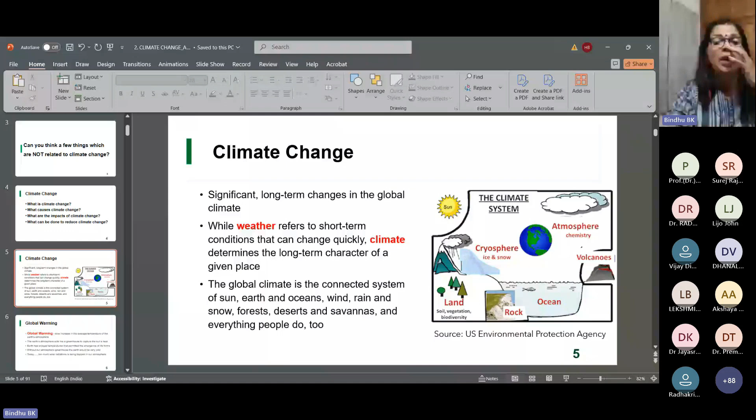So climate change, you know the difference between weather and climate. Weather is very short-term conditions, while climate determines the long-term characteristics. We have been studying it from the 6th or 7th class, weather, climate, etc. And global climate is connected to earth, sun, oceans, etc. And you are well versed with the term global warming. What is the physico-chemical action in global warming? What are the causing gases, carbon dioxide, methane, nitrous oxide, etc.

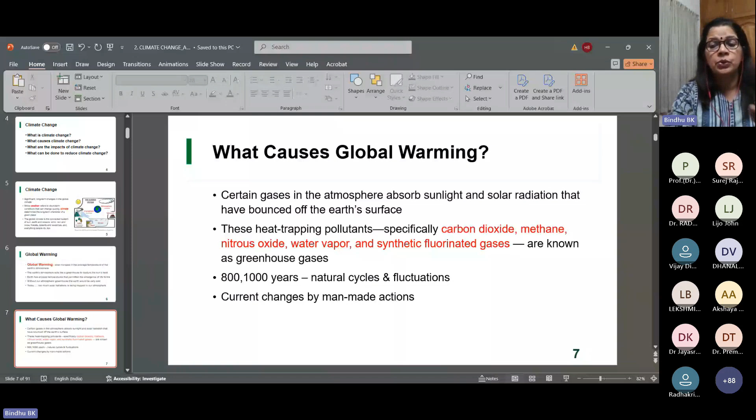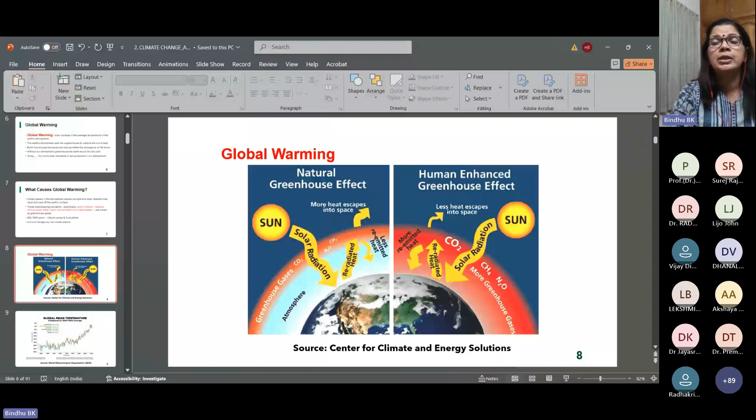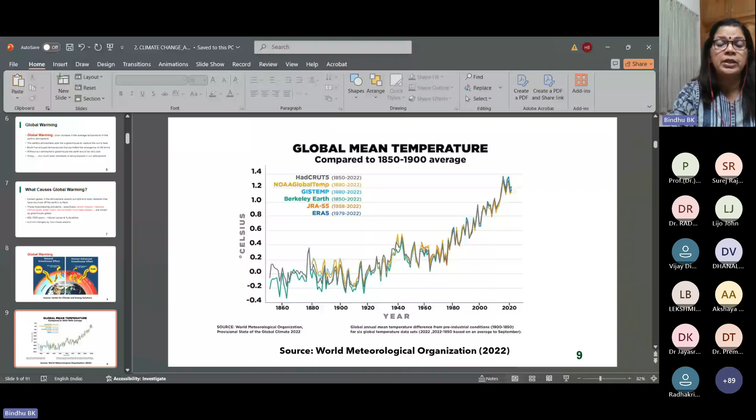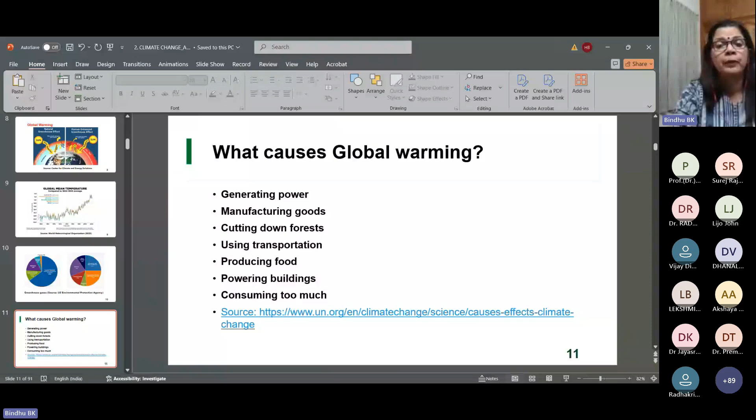And can we say global warming and climate change are the same or synonymous? Even though many times we use them synonymously, there is a little bit of difference in the plain level of their meaning. Global warming is just the rise in temperature, and heat is energy, and when you add energy into any system, changes occur. When global warming is applied in the whole space, it can lead to climate change. So it is technically different, but the causative factors are the same.

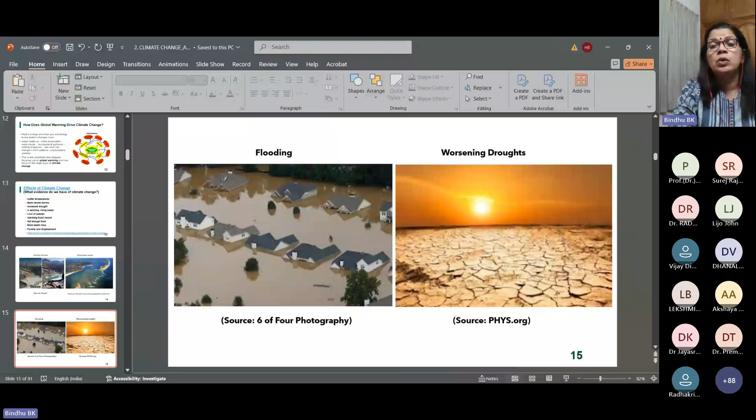So the effects of climate change are very well known: hotter temperatures, severe storms, drought, melting of glaciers, rising sea level, flooding, worse drought, supercell storms, increasing tornadoes, etc. And you are thinking of global warming. I am also thinking of global warming. In this classroom and outside, your society, your home, all people are thinking of global warming, but what action the whole world and the world leaders have taken, that we should know.

And for that, there are certain milestones in the history of climate change. The first one is the Stockholm Conference, the United Nations Conference on Human Environment in 1972. Hope all of you are aware of it. That was the first global summit or global convention on human environment. Till then, global leaders were not that much aware. I am sure that most of you were not even born at that time, 1972.

At that time, the world leaders started thinking of what is to be done with the increasing temperature. So a lot of world leaders participated in the meeting. And have you heard of a speech made by a world leader or a national leader at that time?

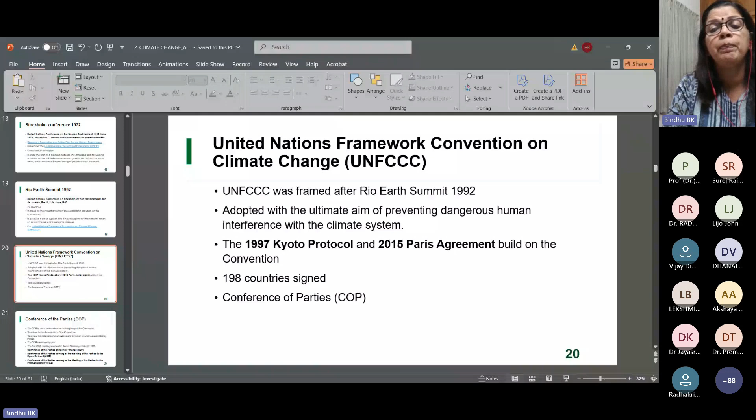So, hello. Excuse me. Okay. Continue, ma'am.

You can continue. Okay. So the COP is numbered from 1995, and the latest COP happened in 2024, COP 29 in Eastern Europe, and the upcoming Conference of Parties meeting is in Belém, COP 30. So we should be aware of that. Anyway, the United Nations Summit on Sustainable Development in New York happened in 2015. And at that meeting, a new plan called Transforming Our World: the 2030 Agenda for Sustainable Development has arisen.

So then comes the concept of sustainable development. So 17 sustainable development goals have been framed, with 169 targets. These are the 17 sustainable development goals. You are familiar with it. And even though it is numbered from 1 to 17, you can see the 13th SDG, that is climate action. Actually, many of the other SDGs are in some way or other linked to the 13th goal, climate. We are moving with that one.

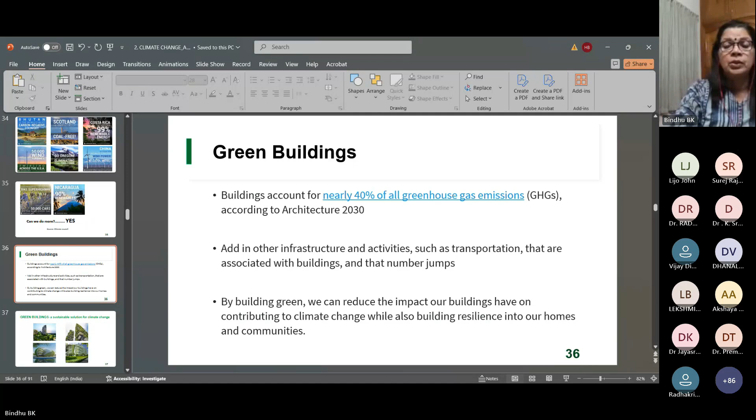A green building can be defined as one which uses less water, optimizes energy efficiency, conserves natural resources, generates less waste, and provides healthier space for occupants compared to a conventional building. These are the merits of green building. They are designed to reduce the overall impact on human health and the natural environment.

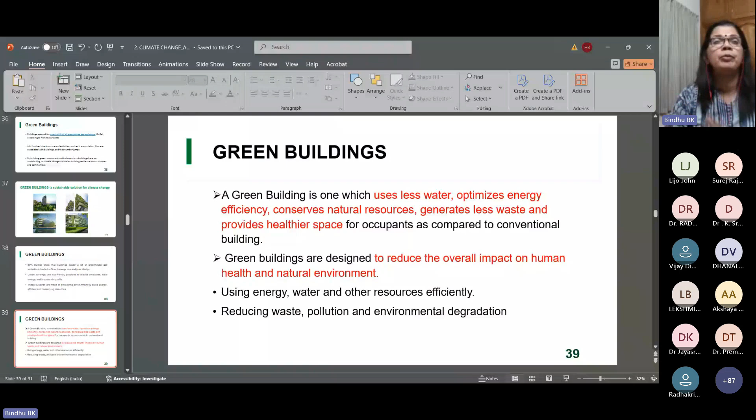If you imagine the building as a central part, it consumes raw materials and at the same time releases pollutants. So we have to reduce the consumption of raw materials, energy, water, etc. At the same time, we have to reduce the production of byproducts and waste products, thus keeping the environment clean. I'll show you this figure again at the end of the session.

The concept of green buildings starts from site planning, how to make the site planning sustainable, building design optimization, optimization of energy performance, utilization of renewable energy, water management, solid waste management, sustainable building material management and construction technology, and of course the health and well-being of the occupants and the quality of the environment. We have to consider all these for a building to be green.

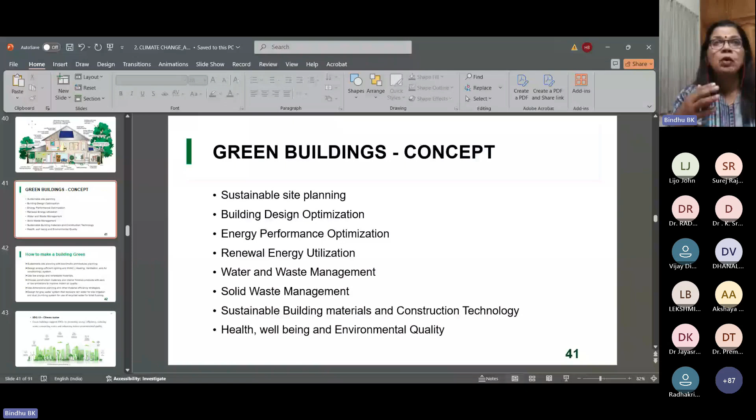So how to make a building green? These are the concepts, and we all have studied them during our course, whether in civil, mechanical, electrical or computer engineering, or science. We should use that knowledge. We are teaching our students to better the society and the environment. We should use all the principles and our brains, conscientiously, to make the buildings green.

With sustainable site planning and bioclimatic architectural planning, we can do that for our own house. Suppose you are an engineer, an owner of a building, a proponent, a client or a consultant, in every way you have a role to make the building green. And it is not only a building; it can be a road, a dam, any infrastructure. Everybody has some role in that.

In site planning and bioclimatic architecture, architects and civil engineers have a lot of role. Design energy efficient lighting and HVAC, that is heating, ventilation and air conditioning systems; civil, mechanical and electrical engineers all have a part in that. Low energy and renewable materials: choose construction materials and interior finishes with zero or low emission to improve air quality. Like that, we have many spaces to act on.

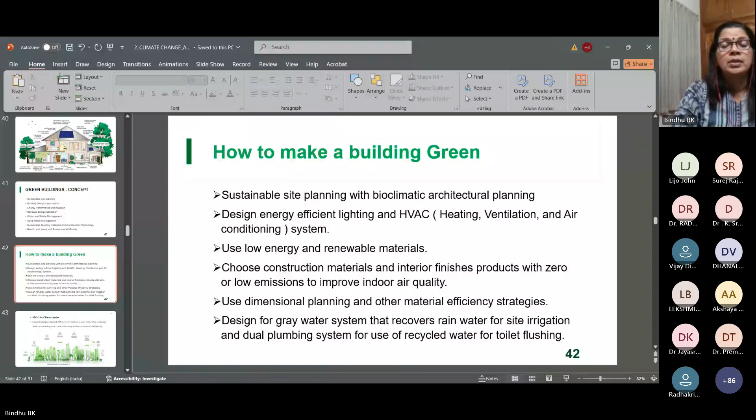So in this, I think it is not very clear. Sorry.

Can you see the slide? Can you read the slide?

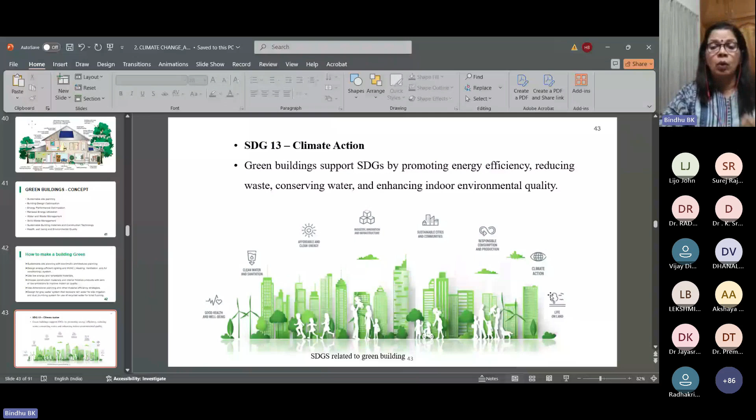Maybe difficult. This is the 13th SDG, Sustainable Development Goal, and many other goals are related to it. Sustainable Development Goals and the green building concept both go hand in hand, because in 1970 or 72 this concept of climate change started, but in 2001 green building technology, IGBC, that is the Indian Green Building Council, started its function, and on its way 2004, 6, 7, 8, it comes like that. It is Sustainable Development Goals, climate change, carbon credits, and green building technologies, everything combined together, and these are the milestones.

I shall leave this PPT to you. You can read it later. And now we are standing here and we are proceeding, we are advancing with better and better technologies for the next sessions.

And of course, green building certifications should be there, because for a building to be green, it has to meet certain criteria. When exam results come, we can get first class or second class or honors or distinction like that. So we have to grade it. For that, the certification process is necessary. Otherwise, people will not take it seriously.

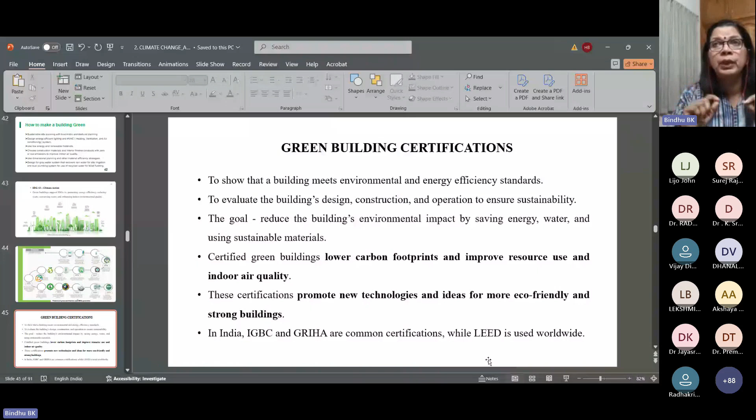The green building rating system does not start during the construction. It has to start from the beginning, when it is in the thought process, till the completion and throughout its life cycle. Imagine this certification process as an accreditation in your college, right? When we are sure that we have to go for accreditation, we have to think about it, do everything fine together, and every process should be documented, filed and submitted, right? And then we get an accreditation for 5 years or 3 years like that. Similarly, here also we get a certification.

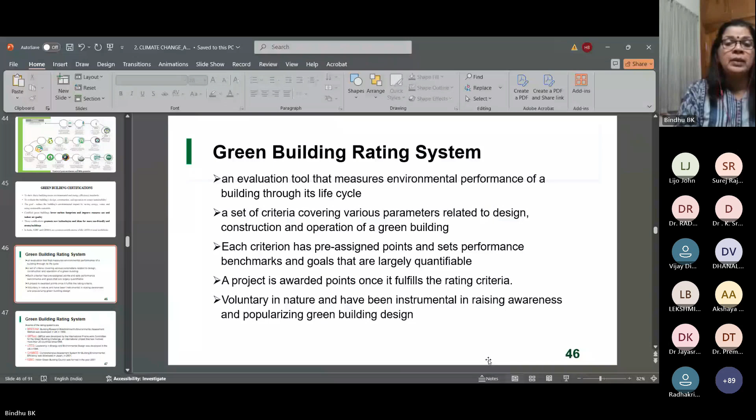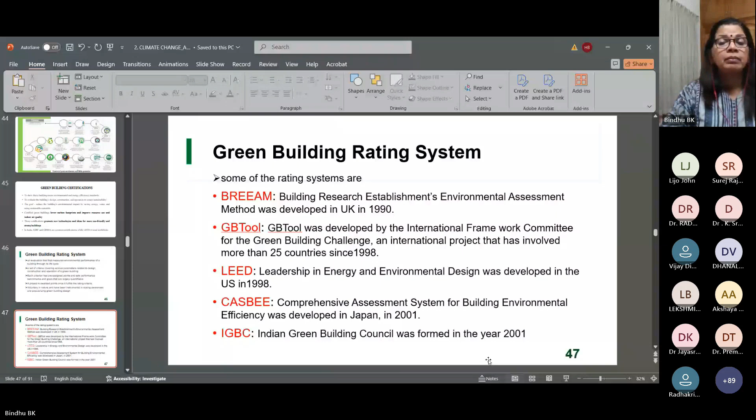So these are certain rating systems across the globe, that is BREEAM, GB Tool, LEED. Most of you have heard about LEED and IGBC. By country, Australia practices Green Star. Excuse me. Brazil practices AQUA or LEED Brazil.

Canada practices LEED Canada. Can you see the slide in between? Let me ask. Surej? Yes, madam, it is visible.

So IGBC is usually the most commonly used system, and that is for private buildings, public buildings, and sometimes government buildings also. But GRIHA is mainly for public and government buildings, and it is developed by TERI. You know what is TERI? The Energy and Resources Institute, TERI, and the Ministry of New and Renewable Energy, MNRE. And LEED is Leadership in Energy and Environmental Design, a world rating system, globally accepted. Usually it is used for multinational buildings and commercial buildings.

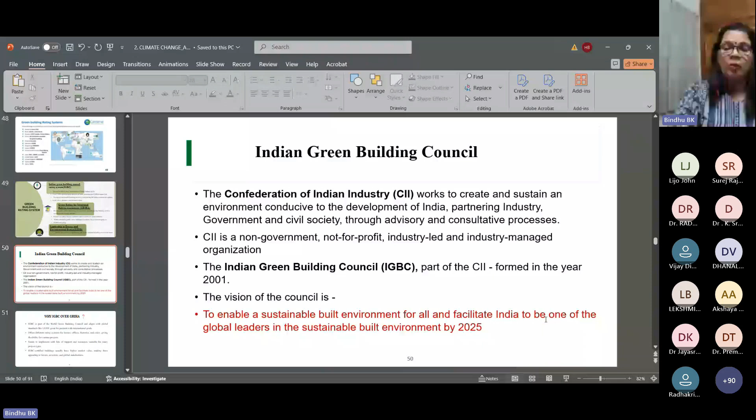Many people prefer IGBC over Griha. These are the two common systems. Griha is purely developed within India and only for residential and some particular types of houses. But IGBC is a part of World Green Building Council.

Its branch is Indian Green Building Council, and it is at par with LEED and other international goals. So any consumer or client, suppose I build a house, an office, or an industry, if I have to follow IGBC green building, one reason is that I should be an activist. I should have commitment to the environment. At the same time, I should have some monetary benefit. People will think like that also.

So if you are a developer, your properties would have higher market value and it will make them appealing to buyers, investors, and global stakeholders. That is an added motivation to make green buildings. So one part is commitment to the environment, and the second part is some monetary benefit for the developers.

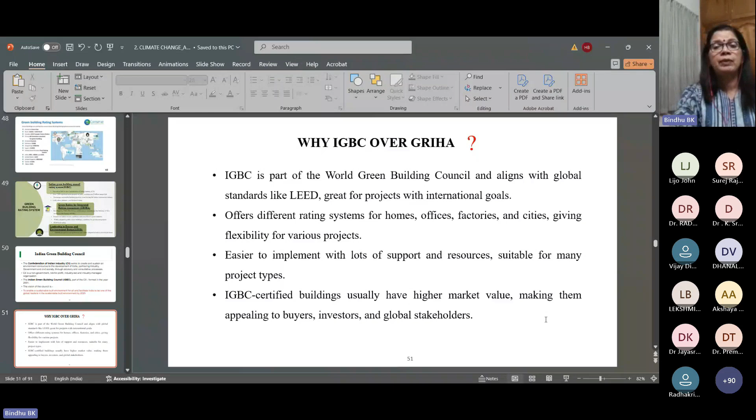Anyway, IGBC promotes sustainable building practices in India. This rating system certifies green buildings based on environmental, economical, and social factors. Earlier there were only economic and social factors, but for the past 30 or 40 years people are thinking of environmental components also. So IGBC has launched about 31 green rating systems.

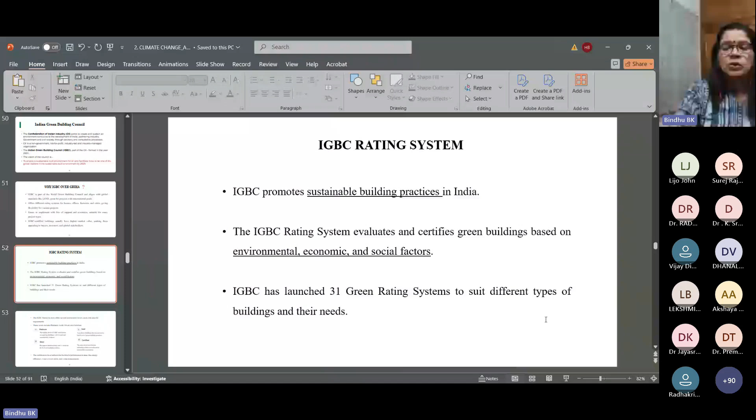You may wonder what are the 31 types of buildings. If residential, you can have a villa, a flat, a living community, or old age homes. Similar different types of dwelling places are there. This comes under residential - there are 5 types of residential, like green homes, green residentials, green affordable housing, and so on.

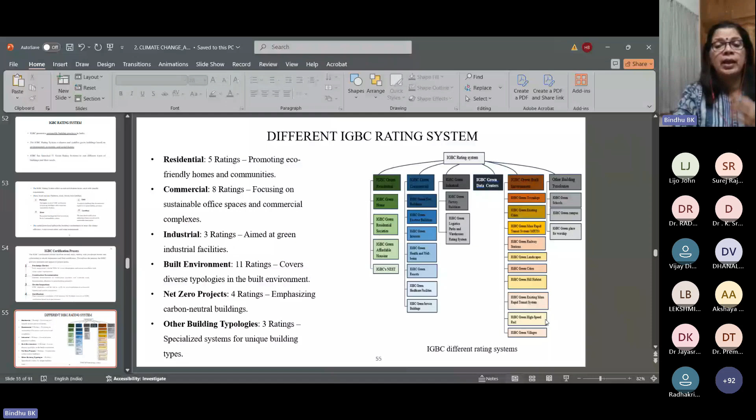Then different types of commercial, industrial, built environment, net zero projects, and other building typologies like IT parks, airports, and so on. So bigger projects are there too. That is why there are 31 typologies that IGBC is rating.

The ratings are usually given in 4 levels. One is the minimum mark, that is certified, just like we pass the exam. Then silver, which may be like second class, then gold, then platinum. So according to the points obtained through the IGBC certification process, it is rated platinum, gold, silver, or simply certified.

The certification level reflects the building's performance in areas like energy efficiency, water conservation, and waste management.

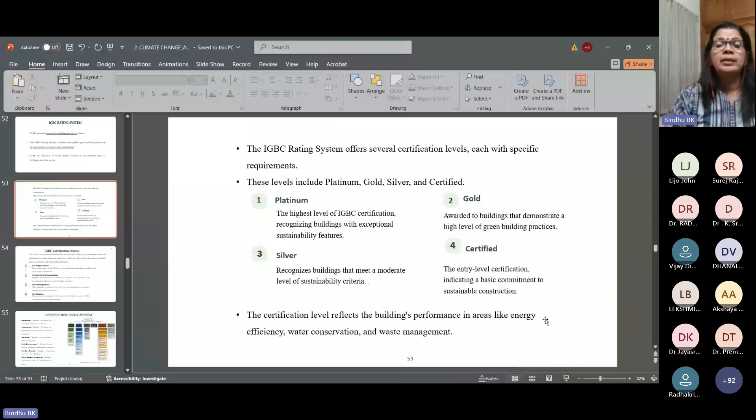Then this certification process - just a minute. Excuse me.

In the certification process, it has to start from the pre-design till completion. Pre-design means not the design stage but before it - when the idea is in our brain, we have to start the certification process, in the thought process. So there is very early engagement with IGBC to review designs and plans and ensure compliance with the rating system. Then the actual operation phase, that is construction and documentation phase. Then the final inspection, and then the certification is given.

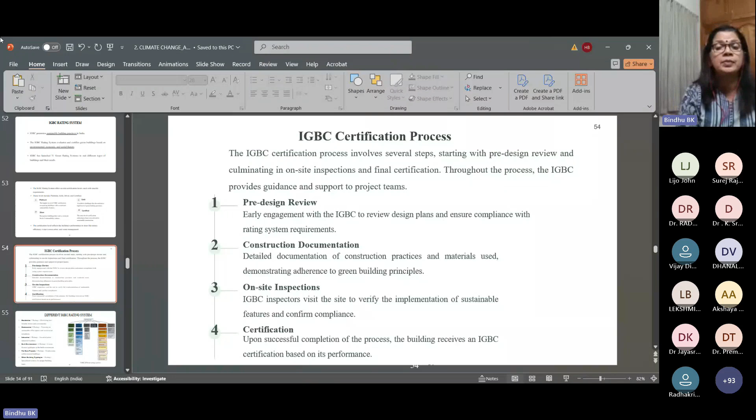But it should go on through the life cycle process. These are the rating systems. I think more will be added in later courses. Now there are 31 typologies, but soon it will be 32, 33, or so.

As per the IGBC rating system, there are 7 categories or features of a building that are evaluated or certified. It is not customary to practice all 7 features for all typologies - it is a general thing. For example, the rating system for a factory building is sometimes different from an airport, or different from a residence. So if there are 31 typologies, 31 codes are available for IGBC.

So these are the 7 main categories or features. One is sustainable architecture and design - when I read the title you can imagine what all is included. Then site selection and planning. Then 3 important things: energy efficiency, water conservation or water efficiency, building materials and resources, indoor environmental quality. The last and most important one is innovation and development. These are the 7 main features of any green building.

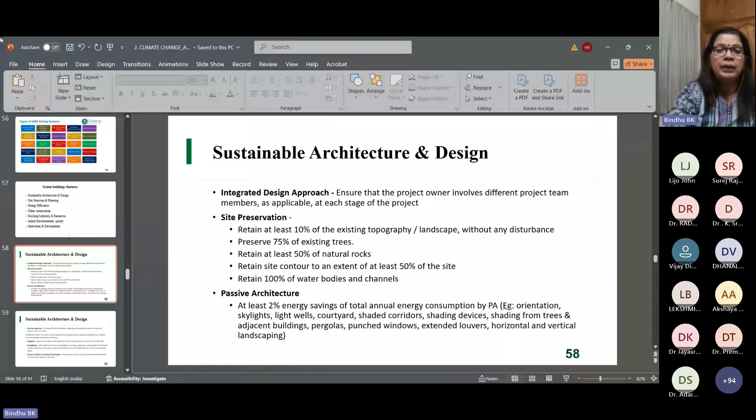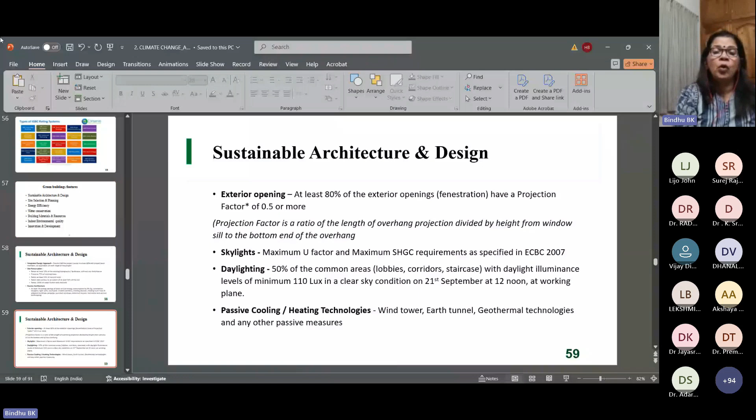The second part of sustainable architecture and design is site selection and planning. Whatever we do, we have to follow the local building regulations, because a green building constructed in Kerala may not follow the same rules as one in Rajasthan or Tamil Nadu — we have to follow local building rules according to its geography, social context, and economic situation.

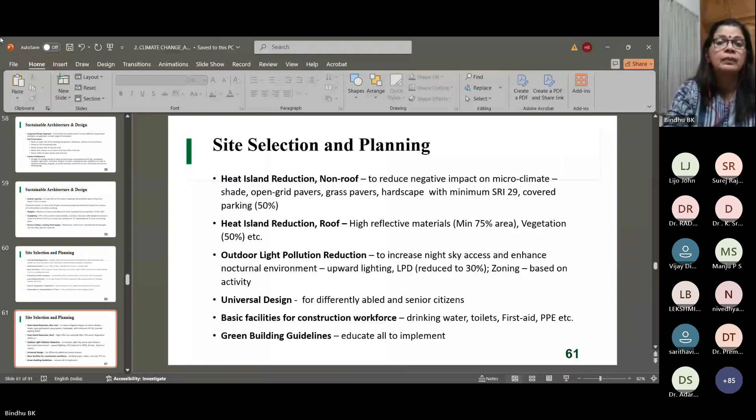Basic facilities for construction workers and green building guidelines should be demonstrated - not pasted, but published everywhere, so that the occupants or users are motivated by such practices. For example, your waste is your responsibility, but reading that, we should have some spark in our mind, right? So you have to showcase it.

Next is a very important part, water conservation. Water conservation carries good marks in the green certification process. The most important one is rainwater harvesting, which is a mandatory thing in the certification category feature. Why do we do rainwater harvesting? To enhance the groundwater table and to reduce municipal water demand - you should not depend too much on municipal water. That is why we do rainwater harvesting.

Water efficient plumbing fixtures are very important, because in our washrooms we are using European closets and water closets with flush tanks. So for every urinal, we should have specifically measured flushing systems. If that is there, you can conserve a lot of water. There may be technologies like that, and you can do more research on how to conserve water using water efficient plumbing fixtures.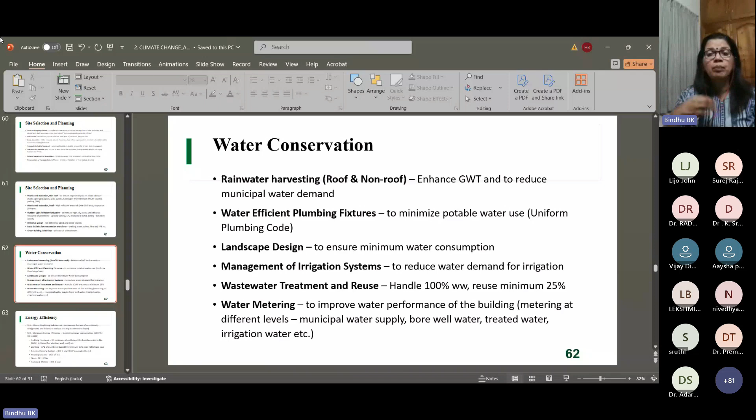But if you put meters for different things, not for our house, but in an industry or a factory, how much water is used for cooling, how much is used for washing, how much is used for some other cleaning, like that, you can efficiently manage the water use and improve the performance of the building. So water metering is very important.

Now comes the most important one, that is energy efficiency. So there are two mandatory requirements for energy efficiency. One is ozone depleting substances and minimum energy efficiency. We are now crying for the ozone hole that we are reading about every day in the newspaper and even feeling every day in our day-to-day life. Ozone depletion, ozone hole, and UV radiation coming down to the lower layers of the earth. You have to encourage people to use eco-friendly refrigerants and halons to reduce the impact on the ozone layer.

And minimum energy efficiency means you have to optimize the energy consumption. For that you have to use the code. You have to follow the code ASHRAE, American Society of Heating, Refrigerating and Air-Conditioning Engineers. ASHRAE is the standard for minimum energy efficiency. So for that, you have to calculate the using energy as well as the embodied energy.

Okay. And for building envelope, you know what building envelope is? Hope you know. All the physical outside parts of a building, that is wall, roof, windows, etc., are the building envelope. So you have to meet the baseline criteria like solar heat gain coefficient. Some glasses will let more heat into the building and some types of bricks or mud blocks will not take that much heat into the building. So accordingly, according to the SHGC, you have to select the material.

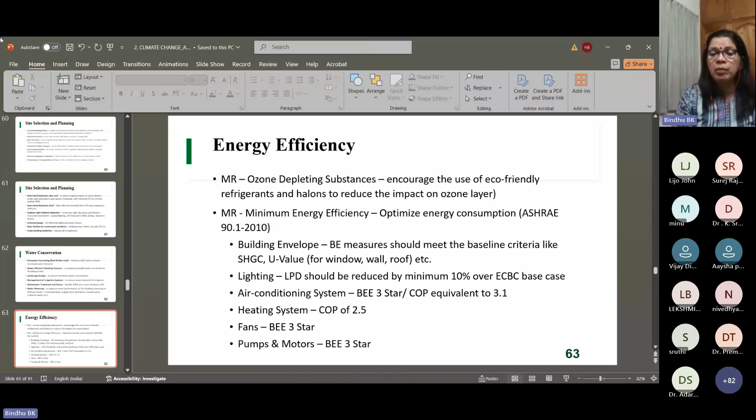Air conditioning system, we have to use minimum 3-star. A coefficient of performance should be equal to 3.1. Heating system, minimum 2.5 performance should be there. Fans, 3-star fans, pumps, 3-star. 4-star and 5-star will be better, but minimum 3-star will be there.

And eco-friendly refrigerants should be used. Enhanced energy efficiency should be there. And we should make on-site renewable energy. And you have seen Kerala CIAL, Cochin International Airport, what is its speciality? 100% solar powered. So they are making 100% of their energy need from the solar.

Okay, similarly, on-site and off-site renewable energy you have to produce. You have to produce, and at least 50% should be, if you are investing for the 50%, you will be credited. Then similar to water metering, energy metering also should be there.

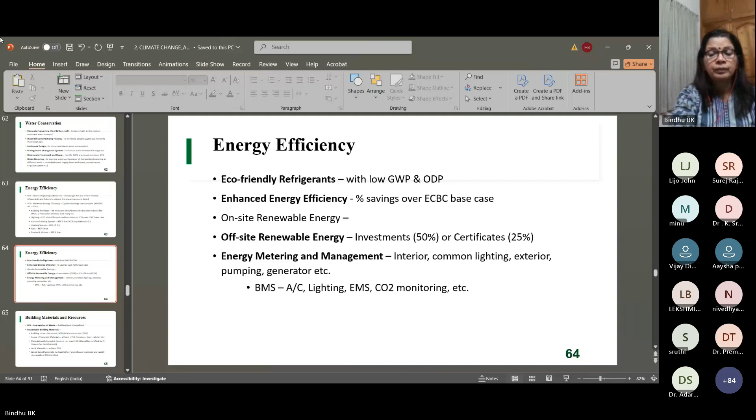Then comes the building materials and resources. What type of materials you are using for the building? So for the materials, even if you are using materials and you are producing materials, what materials you are producing? Waste materials, right? So in the initial stage itself, you have to segregate the waste, whether it is during construction or post-construction or occupancy phase. Whether it is degradable, not degradable, burnable, non burnable, like that.

And if it is a high-rise apartment system or office, there should be some centralized facility for the segregation of waste. And also, you have to use sustainable building materials. What sort of sustainability you can apply in a building? You can reuse the building materials. You can reuse the structural parts. You can use a column. You can use a beam. You can use many other structural parts of the building and non-structural parts of the building.

I'm leaving the percentage now because too much values. I'm already making you bored, but even if I tell percentage wise, it will be more boring.

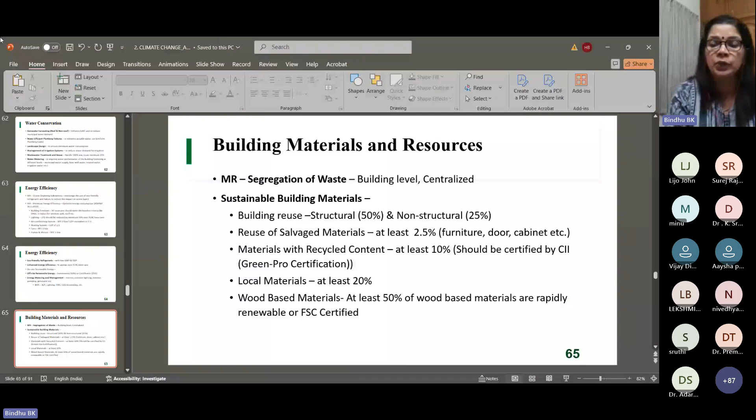Then you try to or encourage the use of locally available materials. You are bringing that granite from Rajasthan or from Kadapa to here. Instead of that, you can use laterite or some other materials locally available. Then wood-based materials, that also should be Forest Stewardship Council certified materials. You try to use them. Then organic waste management, handling of waste materials during construction, and also Green Pro certified products and equipments.

Then next comes the indoor air quality, that is minimum fresh air ventilation should be there in a building, and for that you have to refer ASHRAE code again. And tobacco smoke also you have to control. As per the Ministry of Health and Family Welfare, you have to provide no smoking area. And sometimes at some airports and other places, you cannot avoid a smoking area. So in such cases, it should be 7.6 meter away from the outside intakes, and it should be completely sealed.

And building should be equipped with the CO2 monitoring sensors. And during daylighting, minimum 75% of the regularly occupied area should achieve daylight. Because we are building bedrooms with a lot of windows, and then covered with curtains, making it very dark and putting a lot of lights inside the room. So what is the use of that? That condition should be avoided. As far as possible, natural sunlight should enter the building, and that will help to reduce the artificial lights.

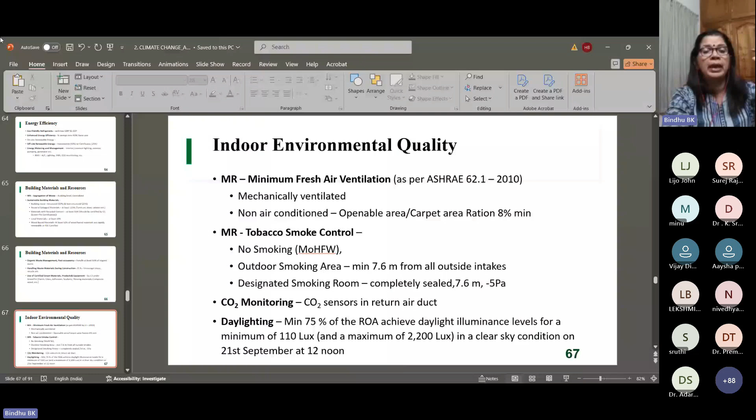Then the occupant should be able to have the outdoor views. It makes the people happy and more productive, and no obstruction should be there for at least 8 meters, it is said. And other facilities should be there for yoga, gym, etc. Then indoor air quality should be tested during construction and after construction.

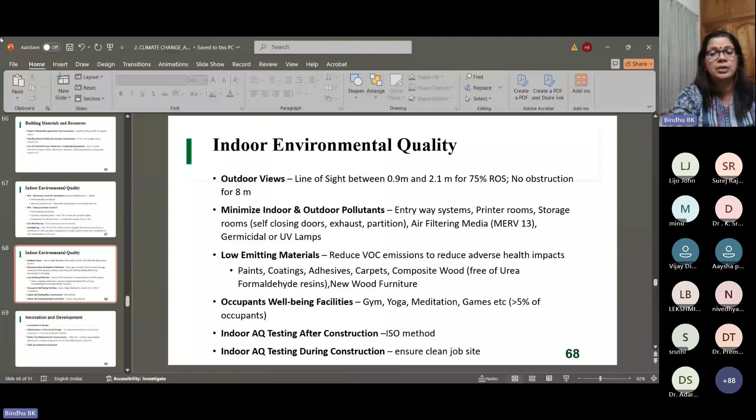Then this is the last feature of the green building. There we can contribute a lot, because all people are learning from mistakes, right? Newer and newer products and technologies are coming into the market. IGBC is a team, and they are giving certification based on the existing knowledge.

And if somebody is there to prove that I am using a newer technology which is not known to IGBC, and if we can prove that it can make this much improvement in the environment, that also can be taken as an added point. So here we can optimize the structural design, optimize the water use, and bring many other innovations in the design.

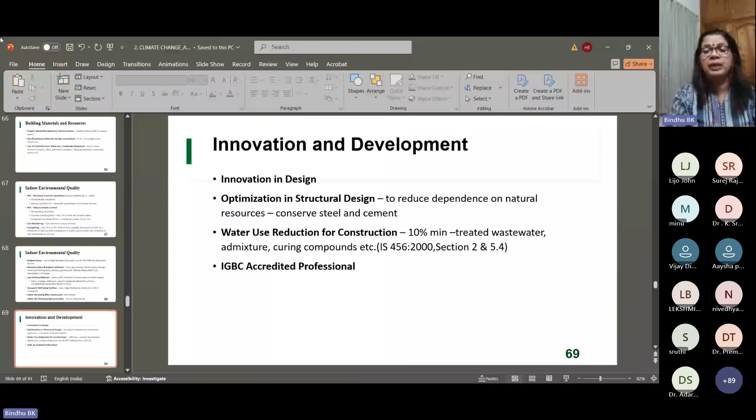So the only thing, you should be able to prove that this is a very new innovation, and it can have positive impacts on environmental protection. So this is a very important part of the IGBC rating system. And next time, IGBC added that point also for the upgraded rating systems.

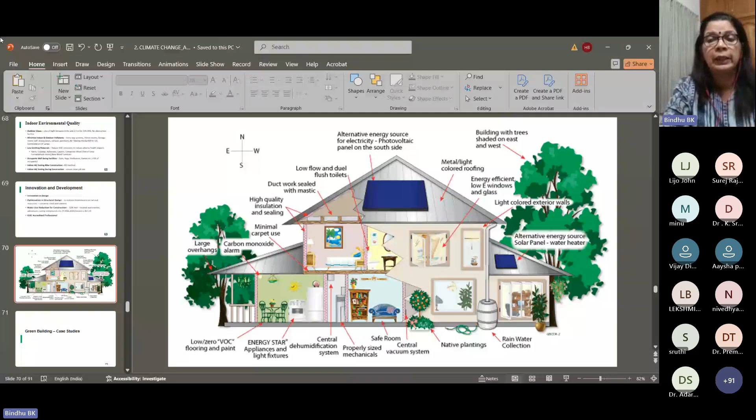Case studies, I'm not going into the very details. The Confederation of Indian Industry Sohrabji Godrej Green Business Centre was the first platinum rated green building, as per IGBC as well as LEED platinum rating, in India.

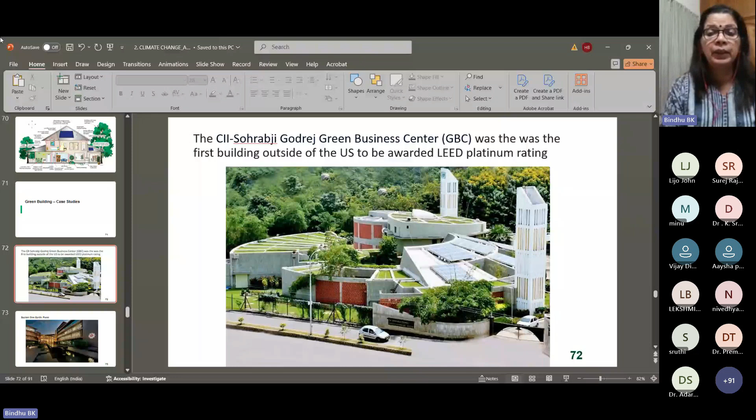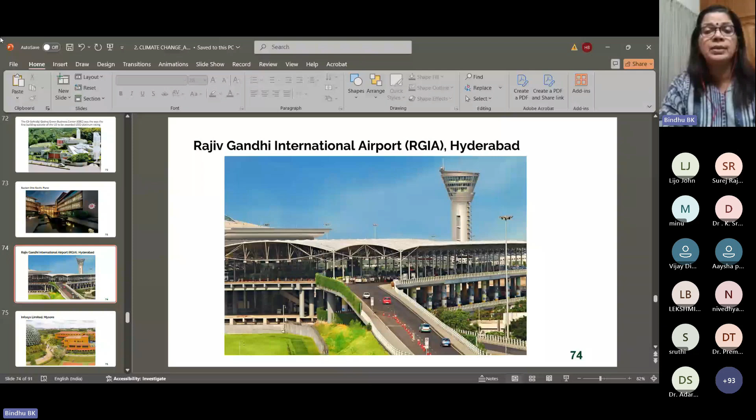And this is Pune Suzlon One Earth building, and Rajiv Gandhi International Airport RGIA Hyderabad, Infosys Limited Mysore. These are only few examples. Infinity Benchmark Kolkata, I-Gate Knowledge Centre Noida, Wipro Technologies Gurgaon. And I'm not sure whether all others will understand.

Next is a case study, this is a house of my colleague, very near to my home, some 2-3 kilometers away. She is Dr. Archana AP, Faculty of Department of Architecture in Rajiv Gandhi Institute of Technology. Her home is some 1 kilometer from the NH 183. Last year, at the 2024 IGBC meeting, she got the platinum rated award. In 2024, only one house got the platinum rating in Kerala. So that is her house.

And she explained in this article what are the special features she has adopted. And this is a Malayalam magazine. I think if your participants are not from Kerala, they won't understand it.

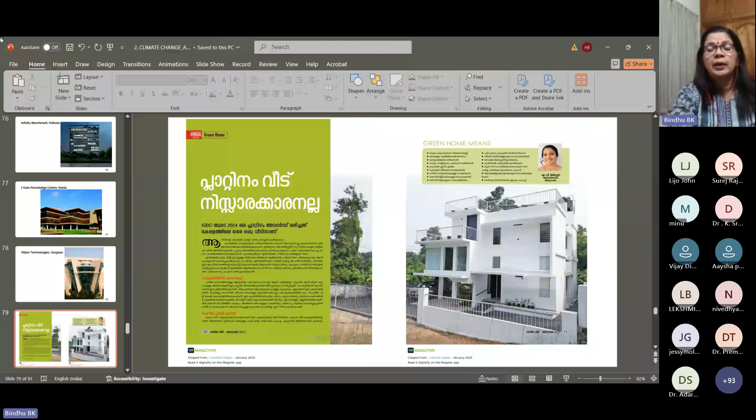So the footprint of the building is only 850 square feet. The total building area at the different floors was approximately 2,500 square feet, but the footprint is only 850. She did it in different levels. The specialties are described in this article. These are the different levels and open space in this area.

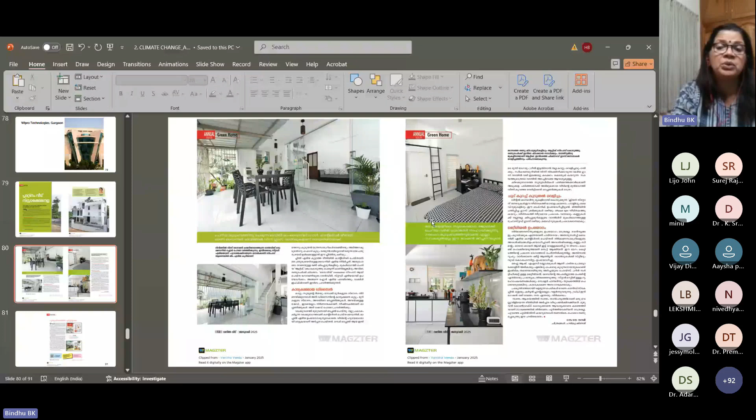In this area, she does not put any lighting, so it is natural, and only night lighting is required. So many attractive features are there. I'm sorry that I am not able to communicate all the special features to you in this short time, and also to the non-Keralites, because this article is in Malayalam.

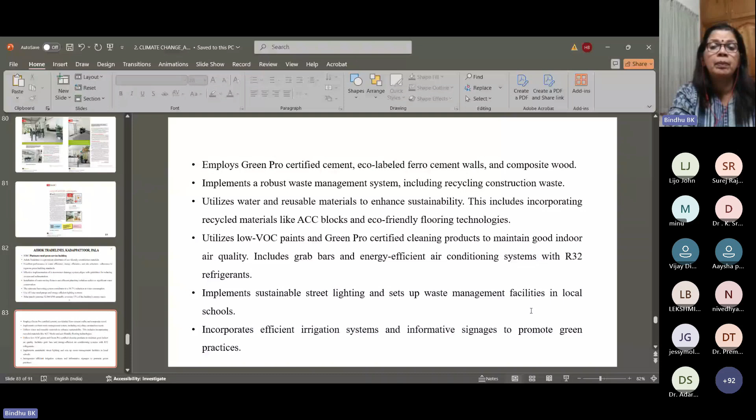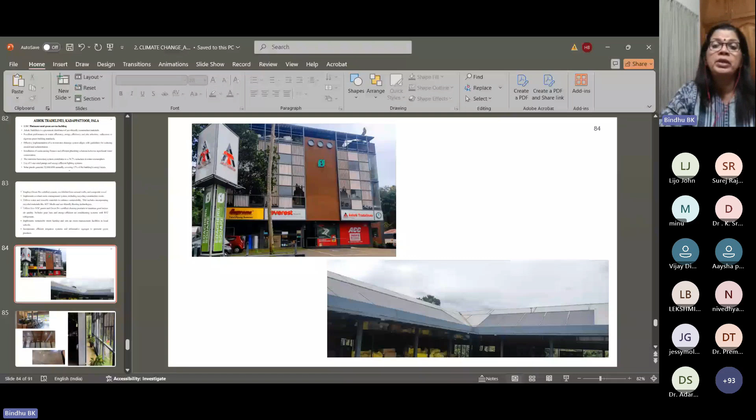Another building is in Pala town. That is a green rated service building. It is a building material selling office and building. Ashok Tradelines, it's a prominent distributor of eco-friendly construction materials. Excellent performance in water efficiency, energy efficiency, site selection, and adherence to strict, rigorous building standards.

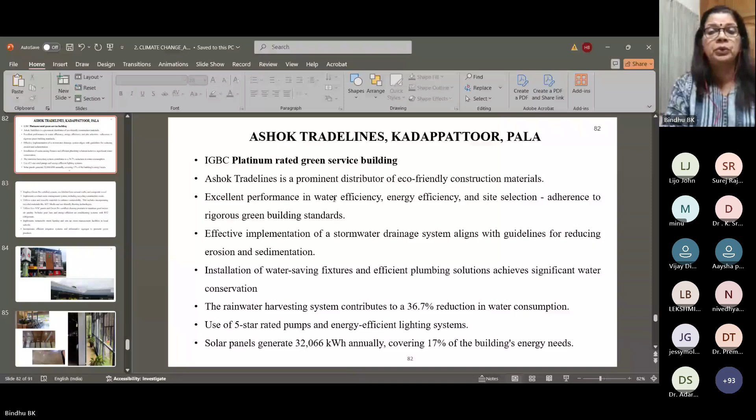We visited that building, and they explained everything they practiced from the beginning, from procuring the land, and still the process is going on. Every 3 years they have to update, just like accreditation. It's a very nice building. Green interiors and natural ventilation, etc.

And as Surej introduced me, I now belong to the Tropical Institute of Ecological Sciences. It's a research organization as well as community development, and we are taking some projects and consultancies. It was founded in 2004. Let me give a very brief about TIES. It is an institute in Kerala focused on ecological research and environmental education. And this building also adopts many good features.

Actually, at the time, when it started in 2004, we were not concerned about green building practices, because IGBC itself started in 2001. We have not gone for that. But now we are looking around us in this building, at all the green things we have already done and what we can do. We are thinking of that.

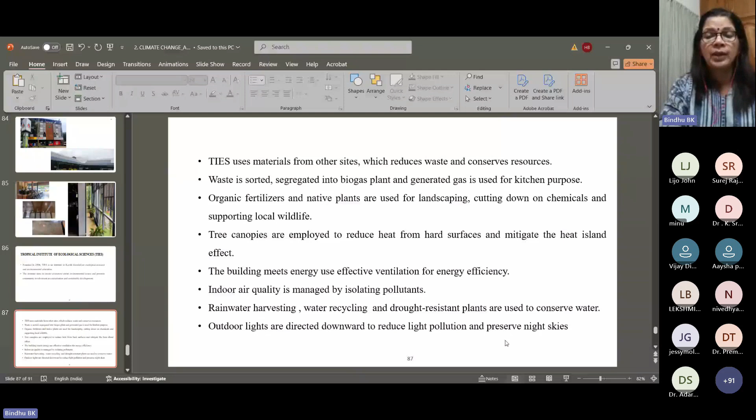About 90% of the office building materials are salvaged or reused materials. When other old buildings are demolished, we bought materials from them, and it is constructed with those materials. Waste is sorted and segregated for biogas and kitchen purposes, organic fertilizers are used for the native plants, indoor air quality is managed by isolating pollutants, rainwater harvesting, outdoor lights. All these we are practicing. These are certain glances of our building.

We have a rainwater collection pond and earth vermicompost, and overall it is a circular shaped design. So if we try, we can also get a green building rated certification, but when it is an extension of a building after construction, it will be very difficult to follow that. So it should be started from the beginning itself.

So for transforming our home into a green home, there is no need to go for the certification process, but just think and, as a commitment to the environment, apply certain things in your home. Advise your children, your students, your friends and neighbors to practice this. Drop by drop the ocean fills, like that it comes. Thank you so much. With this, let me come to the end.

Let me add one more thing. IGBC is giving training courses, and if you undergo the course, they'll conduct an exam for accredited professionals, and if you pass that exam, you can practice as an accredited professional or a consultant in green building. We can give consultancy services to many other projects, big or small. So many of you may know that.

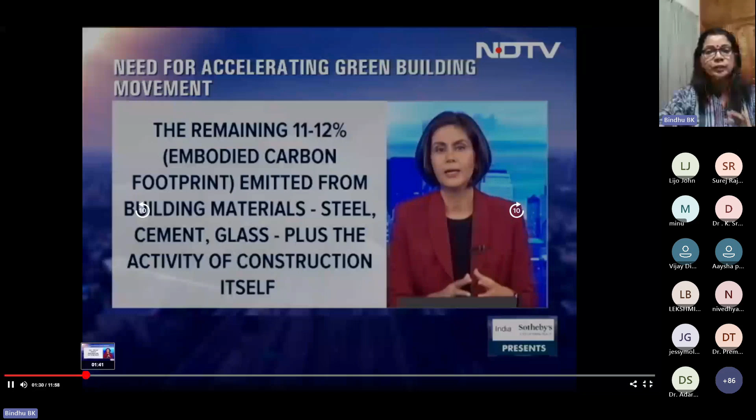It's well documented that the built environment, which includes homes that we live in and buildings that we work in, contributes to 40% of carbon emissions. These CO2 emissions are the biggest contributor to climate change, rising temperatures and global heat waves. Break down this 40% and you get 28% of emissions from operating a building, the energy needed to heat, cool, and power them. The remaining 11 to 12%, known as embodied carbon footprint, is emitted from materials like steel, cement, glass, and how sustainably these have been made, plus construction itself. 70% of India's buildings are yet to be built. That's the biggest reason why we must focus on getting it right. We have three important.

I just showed that video so you know that we are currently in the third position in achieving green buildings.